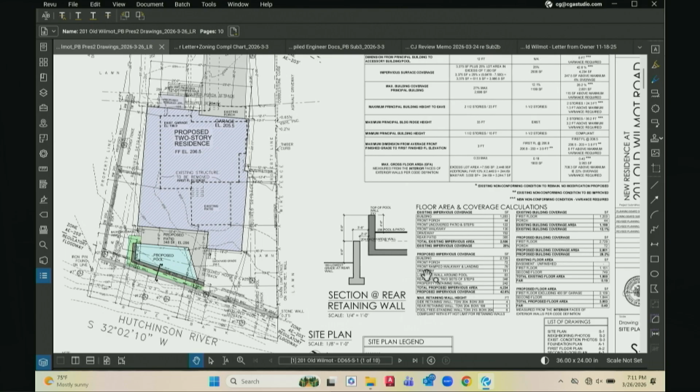This is a proposed new residence. Last time we met, we reviewed the plans with you, and then soon afterwards we met with KSCJ and our engineer, Ralph Mastromonaco. We went over the plans. This is a project that has a challenging site with a FEMA 100-year flood zone nearby, and our engineer has supplied a set of drawings and a report.

At the meeting there were some recommendations and some comments, so we actually adjusted the plans. They're slightly different than before, but a very similar house. We just moved the house towards the front. The house is going to meet all the setbacks.

This is our zoning chart: front, side, rear. We are going to be asking for a few minor variances, and the most significant is the floor area. This is a special home for an intergenerational family, and we are going to be asking for a variance to have a floor area of 3,953 square feet, which is 708 feet over the maximum. But we will not have a basement because of the flood zone nearby, and we feel very strongly we need that kind of floor area to meet the needs of the layout of the house.

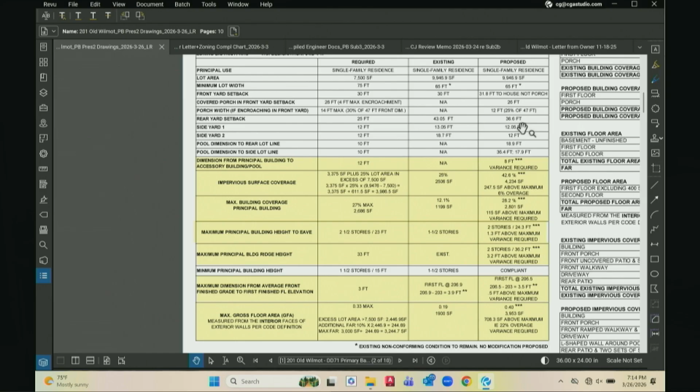Yes, I don't know who did that, but thank you. Okay, cool. The items above that are not highlighted just indicate all the items that are in compliance with the zoning code - setback, all the setbacks that are required. But we are asking for a variance.

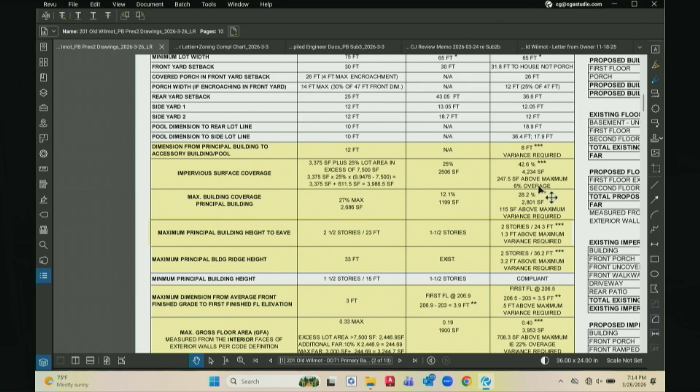One is from the house to the pool - instead of 12 feet, 8 feet - and that's because of the available space we have in the backyard. For impervious surfaces, we're asking for 6% overage, which is under 10%, to fit the house on this property.

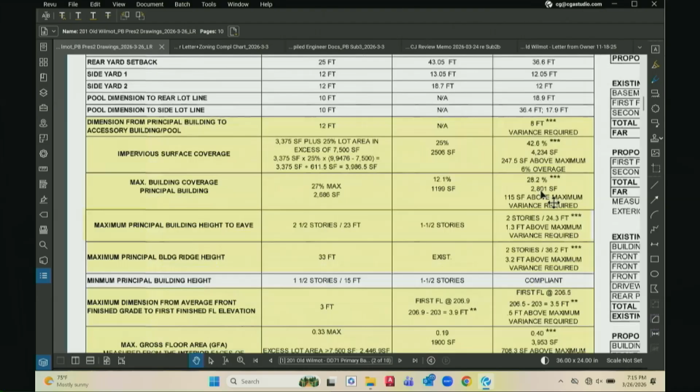We're asking for a building coverage variance that is 1.2% over the maximum, and we are asking for some minor height variances: 1.3 above maximum for the eave, grade to eave, and then 3.2 for the height to the very top of the roof. We'll show you in a minute.

The reason for that is because we want to hit this target for passive house energy, and we need solar panels on the south-facing plane of the roof. And then down below we have...

The front of the house would never meet code, doesn't meet code now because we have to have an elevation of 206.5 due to the floodplain conditions and requirements. That just doesn't meet the maximum height above grade at the front of the house, so we need a variance for that.

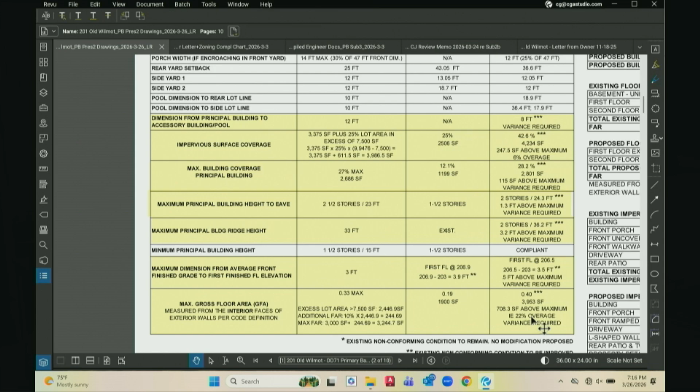On the floor area, we want a house that is 3,953 square feet, and only 3,200 is allowed. But of course, we have no basement, so that also puts us back and makes it so we have to get all the area on 2 floors.

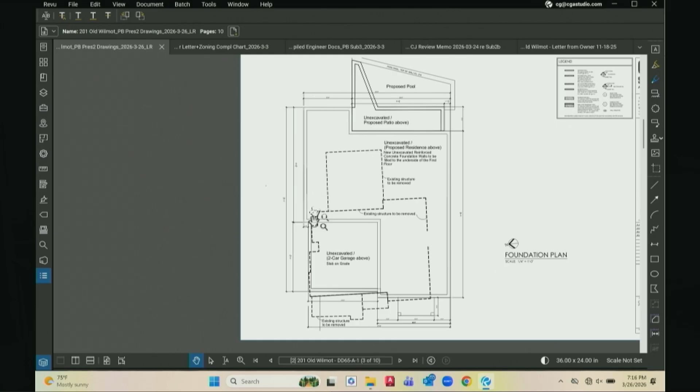Our foundation plan is slightly changed from before, simply because we pushed the house towards the front property line to get more room for the backyard. The entire house will be filled. There will be no basement, no crawl space.

Our first floor plan just shows the layout. We have kitchen, dining, living, family room, and the handicap suite in the back is really important. It allows one of these family members to live at home, with handicap access into the front entrance and through the house to this suite in the back. We're also looking for a small pool and patio.

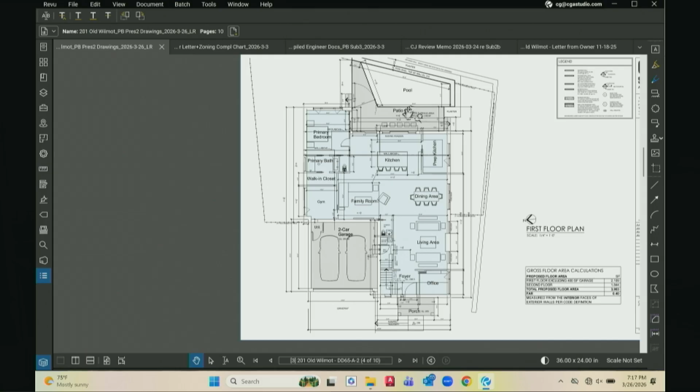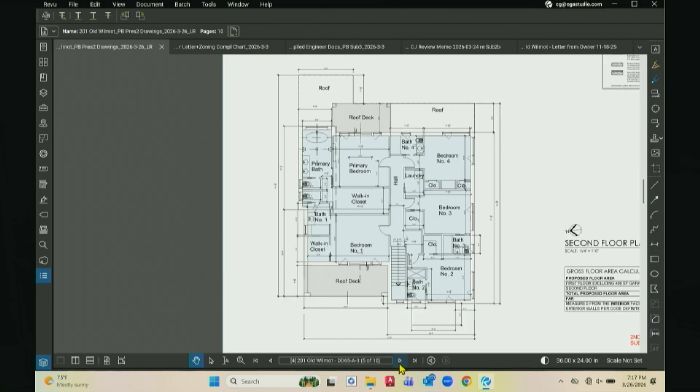On the second floor, we have bedrooms. There is a family with 2 children that will be living in the back, grandmother in the front, and the son in the other bedroom on the other side of the house. This is a family that takes care of each other. Their reason for living together is because it's very important to their way of living and all the care needed for the children and the older people that reside there.

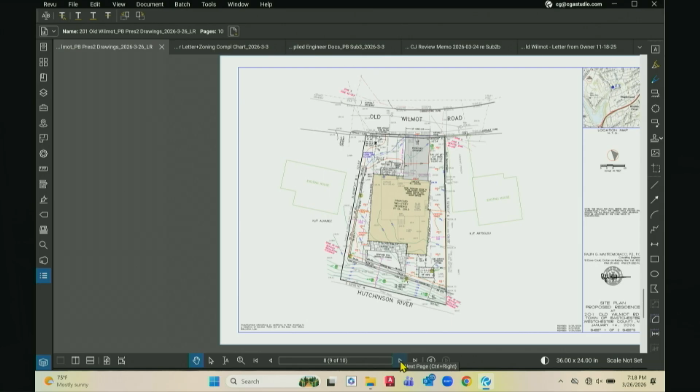I'm going over this again, even though we discussed it last time, just to make you aware of the variances we are looking for. Our engineer is working on providing the information that was in the memo from KCSJ, and I had a long conversation with him today, and he's really comfortable providing all that information. We would also like to go to the zoning board soon, to see if these variances will be granted before we put more time and expense into the details of the drawings.

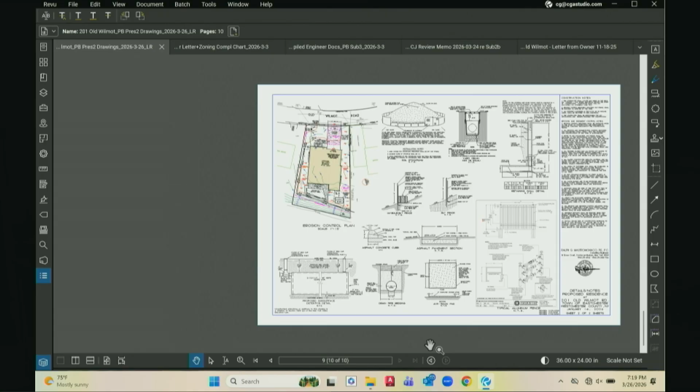Great, thank you. Where is the floodplain? I guess you've moved the first floor up such that you're above the floodplain? The floodplain's in the backyard, right? It's just in the back?

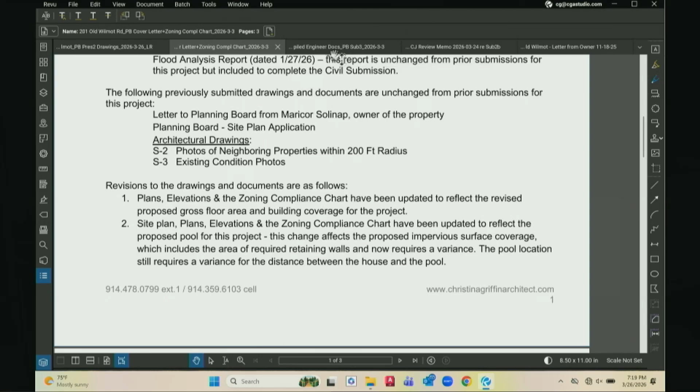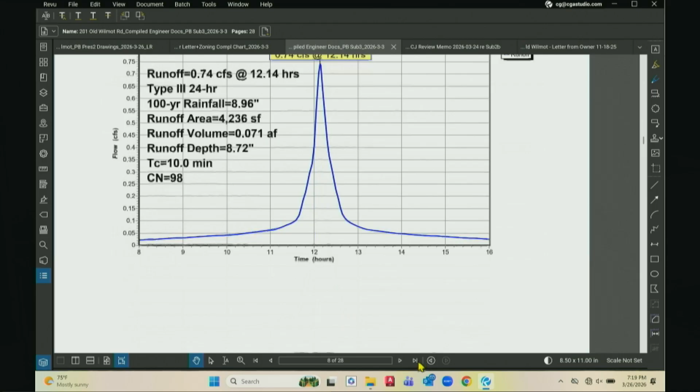I saw, the engineer has a very nice diagram in his report, and I will bring it up. I think it's on the third page of the engineer's report.

There's a report from a Ralph Mastromonaco, your engineer, is that right? Is there a report dated March 2nd, 2026 from Ralph G. Mastromonaco Consulting Engineers? Do you have that handy? Yes, right here, this is a few pages out from his report. Okay, can you go to the third page of that report, because that has a site plan on it as well.

See at the bottom of that, there's something called a regulatory floodway, and there's a pink solid line. It appears that beneath that pink solid line, you're dealing with what we would colloquially call the flood zone. Is that correct? Is this an accurate drawing, or did you say it was recalibrated at some point, or there had been mistakes on some form?

The FEMA maps that the engineer is working with were not updated, and the county was going to update them, but because of funding, they didn't. So what they're showing is not accurate, and he went through an analysis to show it's actually in a different location. But we discussed that with KCSJ, and they said that at some point, maybe before we get a C of O, we should have an official update of the FEMA map, but we're not able to get that at this time.

No one on this board is an expert in water flow and the consequences of a flood zone or flood area, a regulatory floodway, I don't know what you call it, but it does sound like an area that is probably more prone to having surges of water. We just need someone to walk us through what the significance of this is.

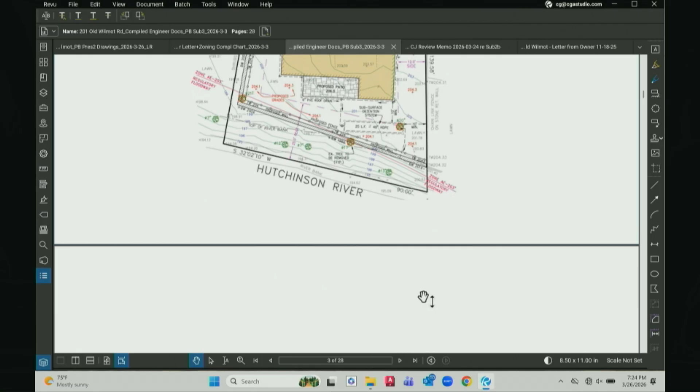Could you just show us the street elevation? I know the massing is just a little bit bigger. Do you mean the architectural drawings as seen from the street? Yep, that's it, right there.

Did you walk us through materials last time? I wasn't here at the last meeting. Well, I can — we even had photographs of the neighborhood at the last meeting to show. If you'd like to see that again... No, I don't want to. Okay, I'll tell you the materials later, I just want to quickly show you this design.

The current house we're removing has a basement that's not used and has a garage in the basement. We want to take everything out of the basement — no basement on this kind of site. So we've brought the garage to just below first floor level, so we have the 5% slope required from the street to the garage, and then a slightly sloping grade to allow handicap accessibility into the home.

This is a house we're planning to have a gable roof. We want the scale to fit the street, and it is more in sync with the larger homes on the street. It will have a variety of materials.

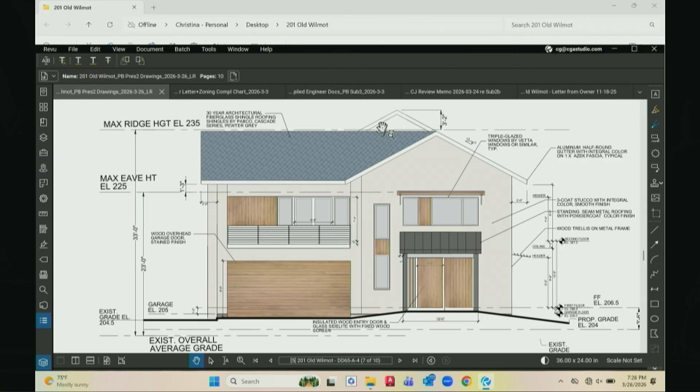The height above the maximum ridge — if you see on the left it says maximum ridge height — the majority of the house is actually under that maximum, but we have a peak here that is set back, simply so we can get another row of solar panels. We set it back to help mitigate the massing and size of the house, so it's only jogged a certain amount back from the front facade.

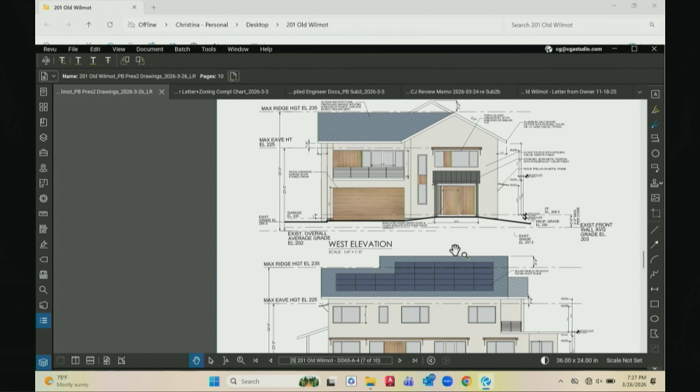And then the side elevation is all similar, all an off-white stucco, with trellises over the windows below, and a deep overhang over the windows on the second floor. There is access to a small patio on the back, and on the second floor there's a small roof deck.

Do you want me to continue? No, I think that's sufficient, thank you. It's very well done.

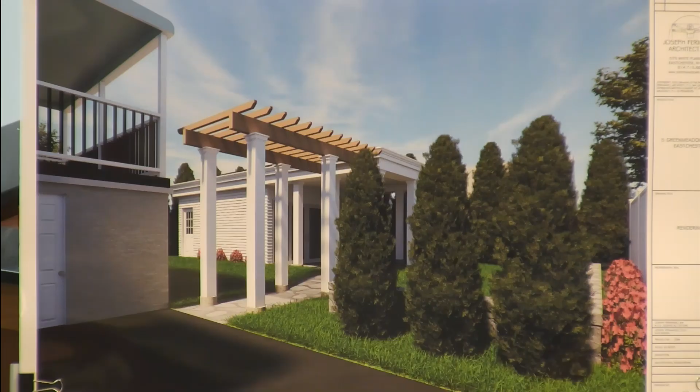The application for the shed has been lowered. The original height was designed at 13 and a half feet, less than the 15 feet which is the accessory structure rule here in Eastchester. In working with the building department and taking the neighborhood comments into consideration, we decided, even though it's built, to lower the roof down to 12 feet. That would mean the roof would have to be removed, reframed, reshingled, and just redone. My client has agreed, based on some comments that he had heard, to do that.

This board had recommended that we go to the ARB, which we did, and we presented this rendering along with some facts about the structure and the finishes, and they had a few comments. They asked for the specific tree type, which we've listed now to show that they would be arborvitaes, anywhere between 12 and 14 feet in height once fully grown.

And we also have a small wall, but it's to sit on, and they wanted the elevation. So we had to show the top and bottom of the wall, which was either 0 or 18 inches.

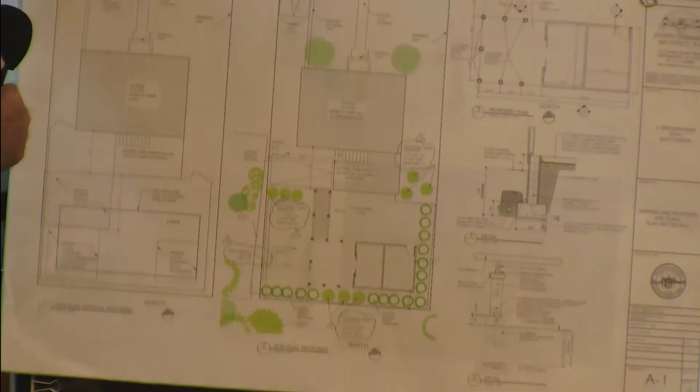The garden wall essentially just goes here behind those trees, and then down along the one side of the property where there's a 6-foot PVC fence. What's the height of the wall? 18 inches, it's a small wall. So you could sit on it, that's all, essentially.

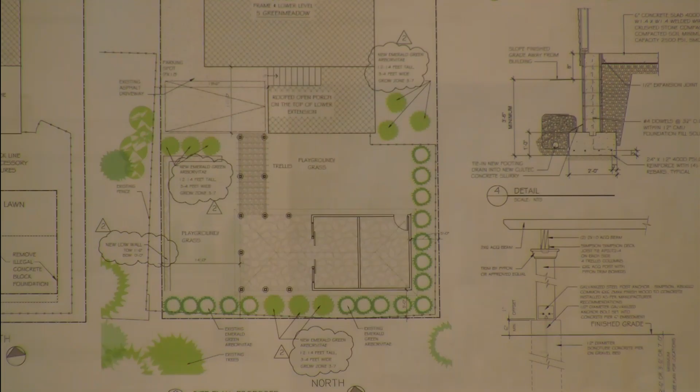Do you have an elevation view that we can see just the massing of the new structure? I know you said it's 12 feet in relation to the existing. Like a plan view shown right here that shows it down 18 inches? No, an elevation view of the entire plan, not the wall.

Just to see the relation of the new structure relative to the house. So this is the structure, and this is the house. Correct, I'm asking for an elevation view, like a cross-section. Sure, like this?

Because the rendering looks a lot more palatable than what it was last time, the massing of the structure, because we've reduced the height. I just wanted to see it in relation to the house. Yep, you can see it here, and this, that's the house. Thank you. Sure.

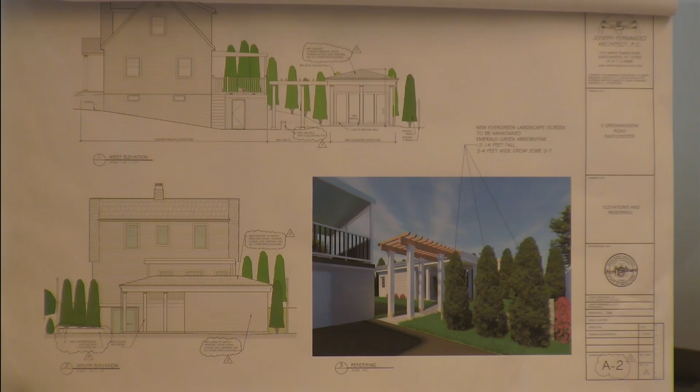Did you change the landscape plan on this now to add new plantings? Yeah, we did add, yes. A significant concern that I have, based on being on and around the property, certainly from Leslie Road you can see that a number of the arborvitaes that are there, I would say rough guesstimate 60% of them look like they're in very poor shape. They're brown, and they don't look like they're going to make it.

So is this going to be all new plantings, or are we talking about using what's existing? What we show on the plan is what the final will be. And if there is something that has not made it, obviously the nursery will have to replace those.

Do you know what the planted height of the trees you're proposing is? I thought what you had reflected on the plan was the planted height, but I think what you just said was the maturity height. So currently I believe they're 10 feet. And that'll be the planted height for them? For the new plantings and for anything that has to be replaced, that'll be the height at the time of planting? Sure.

I think you said 12 to 14. 12 to 14 once they're matured, yes. Oh, what are they going to be when they go in the ground? What's their height going to be when they're planted? 10 feet, yeah, that's what they are now.

And how do we ensure that those are maintained? Because as a general rule, people can take a planting down on their property anytime they want. Understood, yeah, so I'm sure there's plenty of folks that will be watching this. You can impose as a condition that the landscape screening has to be installed, maintained, and replaced for the duration that the structure exists.

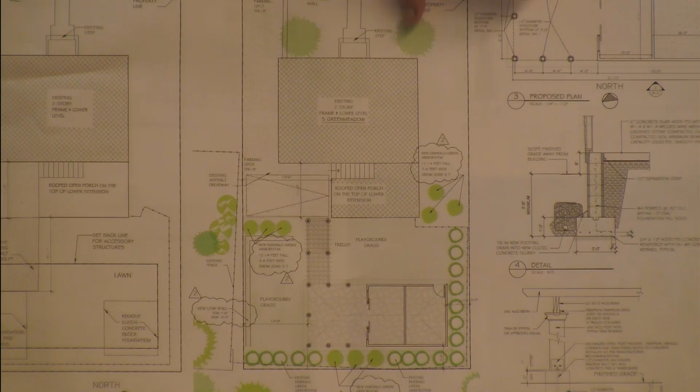And if you were here, there's some space and there's a driveway at 7, and so if you were on the street, you could potentially see something. However, I think the trees are going to help mitigate that.

Is there an option for a different type of tree, one that grows to be much larger? Because just going by Leslie, I'm trying to get my bearings based on the site plan, but the right side of the plan is where you do see it when you drive by Leslie.

I don't know if that's gonna really help with those types of plants, but if you do a larger tree that blossoms to be a much bigger tree, it'll hide everything. It doesn't change the impact on the neighbors, but I'm just talking from the street view. Right now you can see it, and I don't know if that's going to do it justice.

I think that'll change once it's in there and filled in. I think a larger tree, an oak or a maple, has a trunk and then this plumage, right? There's a lot of space there. This is really going to kind of create a screen, and I think this is going to help with the overall disappearance.

I can speak from my own experience. I had a neighbor who paid to have a tree removed, and it was a very large, old, mature tree. It upset me greatly because all of a sudden there was no screening at all that this tree had provided. Well, I paid for the neighbor to put in arborvitaes, and those grew very quickly, and they provide an excellent screen right now.

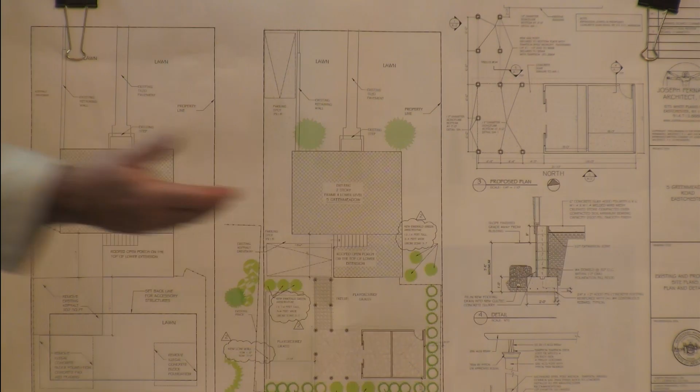Remember this entire site had nothing, just a small bush between 5 and 7. There was no coverage at all to look down into this property. So I think the amount of screening he's putting in is really going to deflect people.

What about the eastern-facing neighbor? Do they only have a fence between them? Number 6, which we did many years ago - that recently changed hands, young couple in there, and they had no issue. The property also slopes down that way, it does slope naturally, away a little bit.

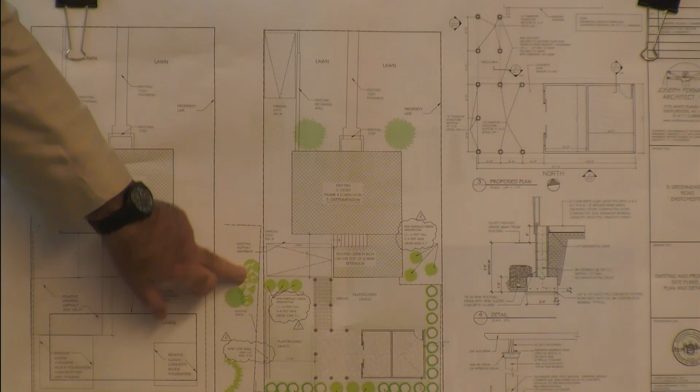So there's nothing blocking it from their vantage point? There's nothing blocking - there's a fence there, but no trees. A 6-foot fence. And I think they have a little bit of landscaping that currently exists on their property as well. What's the height of the structure, the final height right now?

The final height, if approved, would be 12 feet - you have a 12-foot arborvitae. I feel like 12 feet for those trees isn't going to be enough, personally. 12 feet would be the ridge, so the entire thing would be covered at eye view, but you're at a lower elevation. If you're at a lower elevation, unless you're gigantic and 20 feet tall, you're not going to be able to see over that.

You're looking at an angle upward, right? Right. I still think there's other species out there that could be taller than 12 feet. As a screening, I think this is the best option.

So I think we're going to write this condition of approval - if we find that these trees just don't survive and need to be replaced, can we ask them to put something in that gives more screening? Sure, we can craft the condition to reference the species proposed on the plan, or a species with similar features, particularly height and width. Similar or greater features. Right, right.

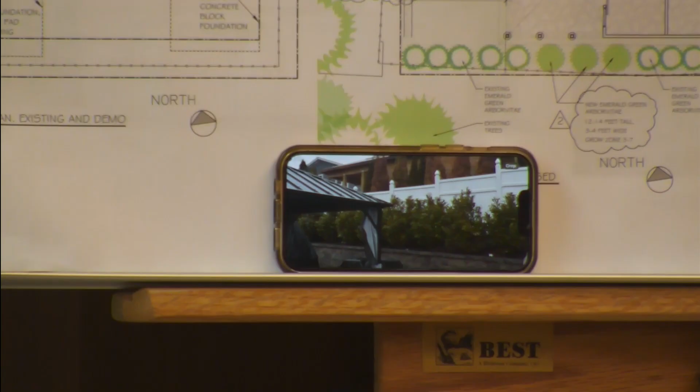Okay, you can go now. This is looking from your house? Yeah, so that's my backyard, it's like here, and then you come outside and you see that, and the trees are already starting to die. How is anybody even gonna maintain them if he's gonna run trees throughout that whole side there?

Yeah, the trees are already dying, not surviving. They're going to put new trees - that's going to be part of this approval, obviously those trees have to leave. And if they go into disrepair, they got to be fixed again. Not only that, we're going to ask them to get a species that will survive there.

I don't know how to answer the question about how you maintain them. Yeah, how is this going to be policed? That's the question, because I'm concerned - I've seen that myself. I commented before that it looks like 60% of the trees there, rough estimate, are brown and dead. They're never gonna survive.

That was the first go-round, what makes us think the second go-round is going to be any easier? Because there may be a problem with planting in such a tight area, and maybe there's bad soil there. I don't know. But what happens if, and this is a very real possibility, the brand-new, very best trees don't thrive?

And we heard that, so the nursery will come back and replace them. Well, I know the nursery isn't probably going to come back and replace them indefinitely, five years from now and whatever. So this is a continuing issue, because to me, this is a deal breaker if you cannot shield this structure from Miselia, from the Farmasanos, from all of the neighbors who have complained about what is admittedly a very large structure, a disproportionately large structure, even if it is technically code compliant.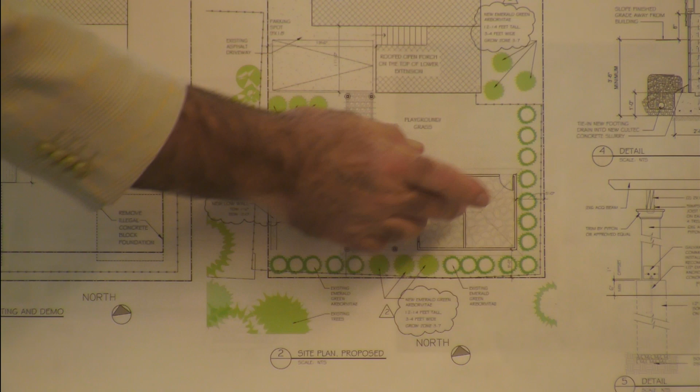And this is really where the storage is - that single man door is in the back. Understood, thank you. So just to Mike's point about doing the neighborly thing, since they're reframing the roof and everything's coming down, it'll be just as easy to move two walls a foot to be neighborly. It's not a big deal. The foundation is all built - are you suggesting to tear it down to the ground and take out the foundation?

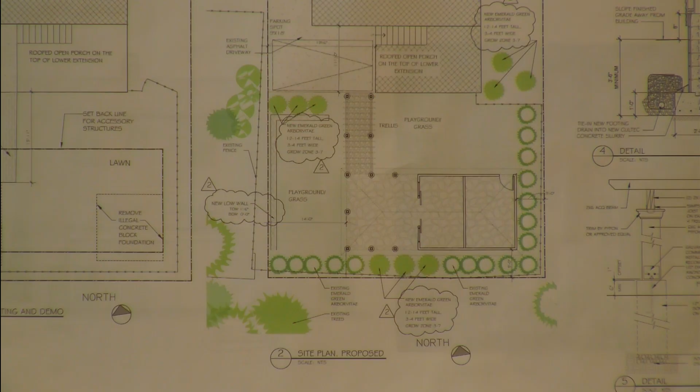No, not at all. You just shore the thing up, move the foundation, put up another wall - not that complicated. That's a big ask at this point, especially since - no, I'm just saying his request wasn't overspoken. It was, you want to do the right thing, make everyone happy, take a foot off both sides, and everyone walks away. He's already talked about lowering the roof. Sure, thank him for us.

So back to the landscape architect - can you get him to come up with a species that we think will live there and thrive? And can someone draw an elevation? So what we'd also like to see is someone show us what this is going to look like from the neighbor's yard. Please draw something really pretty that the woman who came up here says she's going to look at every day. Right now I have it in my head, but I don't really know what it's going to look like. So when that architect is hired, please ask him to draw enough elevations from enough aspects where we all feel good that this is being covered.

The landscaping that's currently there was installed some time ago, last year I guess. Since this process has started, he's been a little taken back by the whole effort, unfortunately. If you went in the backyard, you'd see there's stuff on his lawn, and he's just kind of upset with the whole thing. I think there was no irrigation installed - there should be watering irrigation lines that will constantly keep these things watered. And if they're watered, they're going to grow.

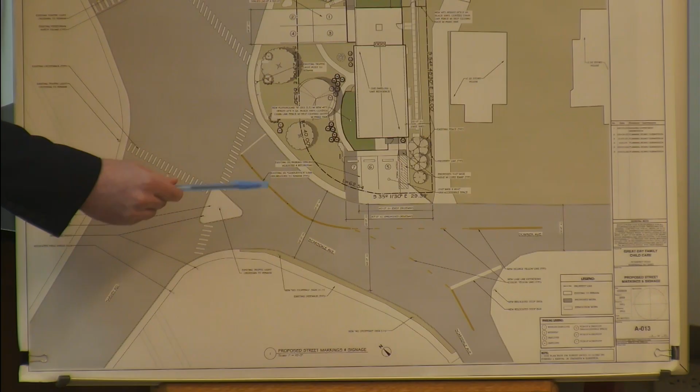I want to move to where most of the actual modifications have taken place, which is the center of the plan here. Right here in the driveway off of Harney, this will be updated to show no modifications at all. We are proposing not to touch that driveway and to confirm there are no pickup and drop-off operations proposed at this driveway. All of those operations will happen in these 3 parking spaces along Downer/Scarsdale, and we're showing that the width of the driveway is existing approximately at the beginning of the gray area, and will be extended towards the end of this gray area.

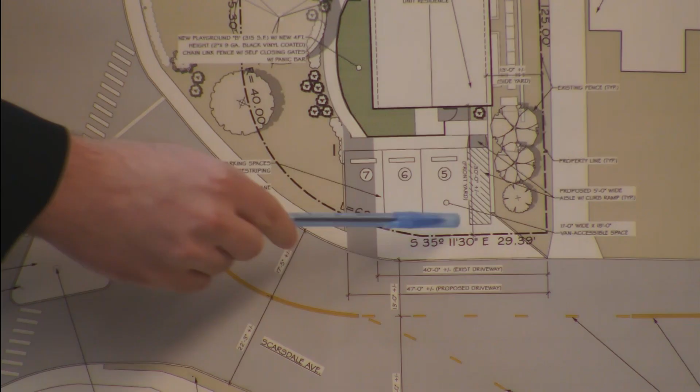We are providing enough space for these 3 parking spaces, one of which, the one all the way on the right-hand side, parking space 5, will be a van-accessible ADA parking space. There was a little bit of confusion in our prior comments and submissions about that ADA parking space, and we just want to provide clarity. The site is required to provide 1 ADA parking space, which has to be van accessible. All that really means is it's a little bit wider than the other parking spaces directly next to it, and it has that access aisle right there.

Now we also have some additional signing and striping here. You can see that the roadway has been changed quite a bit. We were able to do this in conjunction with conversations with Dr. Greeley, who, as we discussed in the prior meeting, noted that Scarsdale has quite a bit of space and width here, approximately enough for 2 cars to be side by side if traveling in the same direction.

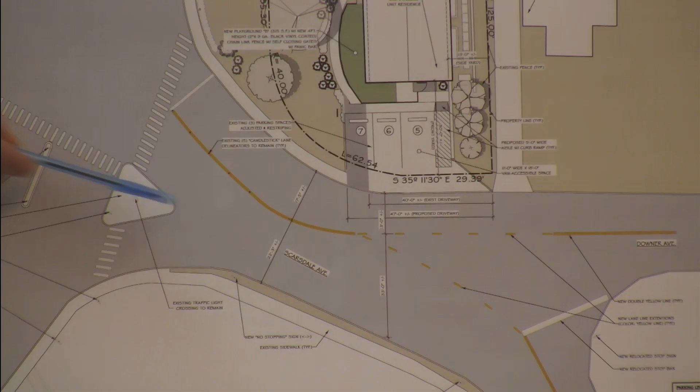In order to formally demarcate that and determine how much space is really there, we've taken the existing striping that shows the center line of the roadway and extended it to approximately where the pickup and drop-off area begins. We've dimensioned out where the narrowest point is, as well as approximately where the narrowest point of the other side of the road is.

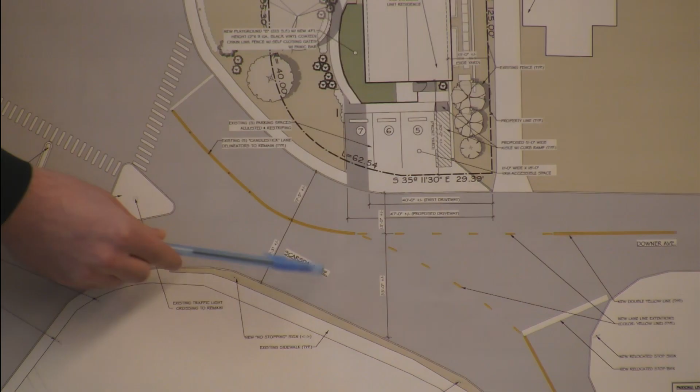You can see here, on the key direction where people might be taking a left into the driveway or going around them, we have a little bit over 22 feet in width, which would allow us to have 2 11-foot lanes—typical lane widths are about 10, 11, or 12 feet. So this allows for 2 very typical 11-foot lane widths. This is plenty of space for someone turning left into here, and if on the odd chance there's someone traveling right behind them at the same time and they need to go further around, they're able to safely take a right and go around them.

Now, in order to also help that movement, because we understand that is a key movement, is the potential for someone to take a left in here, we recognize that currently people may park along this side of Scarsdale. So we are also proposing to add 2 new signs, one approximately here and one here, that are no stopping signs to show that you can't actually park your vehicle there. This is very similar to the other side along our site frontage, which already has signage similar to that to show you can't park there. That's important as well for this movement here.

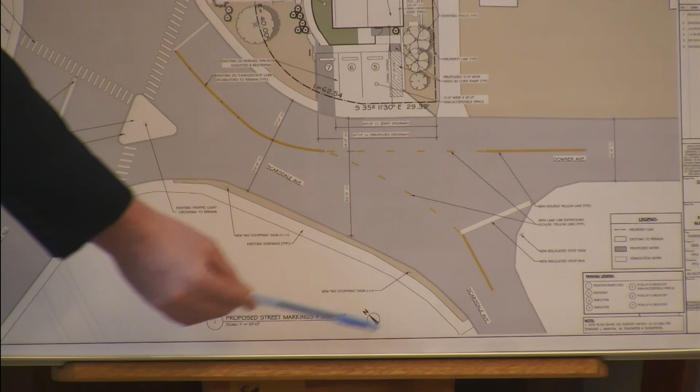If you've driven around here and tried to go from Scarsdale and turn onto Downer, you can notice that the current stop bar, located to the south around here, if there is a car parked here, it is very difficult to see anyone coming from Harney in this movement. You have to instead come up to the intersection and try to look both ways. There is also a bush on the corner here that hinders sight visibility. So those reasons are why we are proposing to move the stop bar from its current location to closer to the intersection, where people have to stop anyway to see both directions of traffic, to make that a safer movement and increase sight visibility.

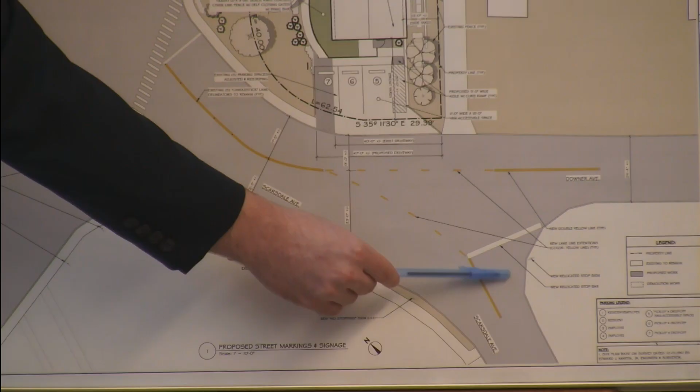Now we also have some striping right here to show the movement you would take if you were on Scarsdale to come up and take a left. This is again to allow for better traffic safety, mobility, and efficiency. With all of those updates, we do believe this would operate safely and efficiently for people attempting to pick up or drop off their children in that pickup drop-off area off of Downer.

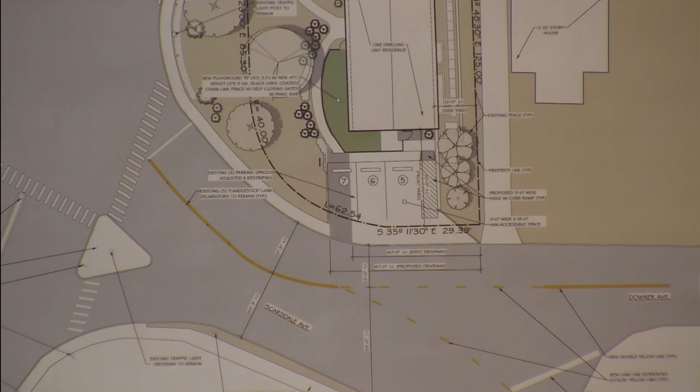Can I just ask, where you have the crosswalk here, underneath the triangle on your illustration, that's one car width, right? Can you point that out again? Below the triangle, directly beneath it, the crosswalk there? Right here? Yeah, that's the right turn off of Brook Street, or Harney? I'm not sure of the exact width of it, but it would not allow for two cars.

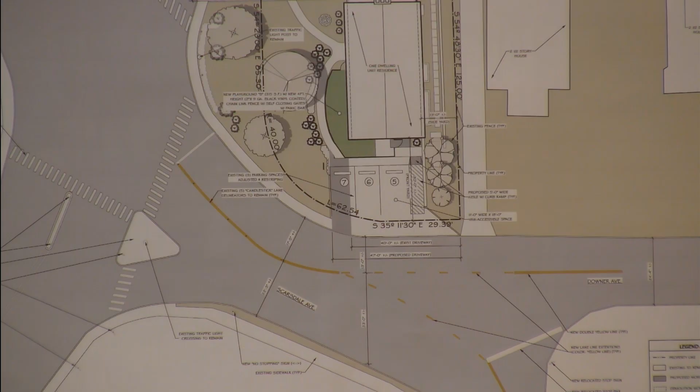It's one car, yeah. I don't live in this area, but I've been here many, many times. It's a very difficult intersection because you're coming off of the Bronx River Parkway or across the Bronx River Parkway. There are two lanes, and right at that stop there's a traffic light. There's a left turn only lane, and then there's either a right turn or straight in the other lane. So the lane from which you would be making the right turn onto Downer is already sort of a bottleneck, where you're getting the traffic going forward and the traffic going right. It strikes me that envisioning this as two lanes of traffic going in that direction is wishful thinking. You can put all the signage up you want. That's blind signage coming around the corner. I will need a lot more convincing to believe that's two lanes, based on my own experience with this site.

If I may respond to that, Elaine Dew, licensed professional engineer in the state of New York, traffic engineer with AKRF. Just to clarify, we are not changing anything about the lane width over here, we're not modifying anything. Yes, that provides enough width for only one car, and we're not proposing to widen that. Over here, we're just changing the striping slightly so that now you're allowing a vehicle to pass by if there is, for instance, someone waiting to turn left into the driveway here on Scarsdale Avenue. So we're not proposing to actually stripe a second lane, but we're showing the measurements to show that it's wide enough so that you can pass if that is needed.

Okay, I remain skeptical, that's all. What is that width? Can you just zoom? Which width, this one over here? I think it's 22, you said it was 22 feet. It's just over 22 feet. And then there's another 11 feet on the other side? Yes, this is 11 on the north side, so 22 feet on the southern side. Correct. Which is sufficient, again, for a vehicle to pass by if someone's turning left. Sure, and I guess currently the usage is just one lane, is that what you're saying? Yeah, current usage is just one lane. However, it's striped as a very, very wide lane. So just to clarify, the intention is for it to still function as one lane, however it could accommodate if you had a driver. That's what you're saying?

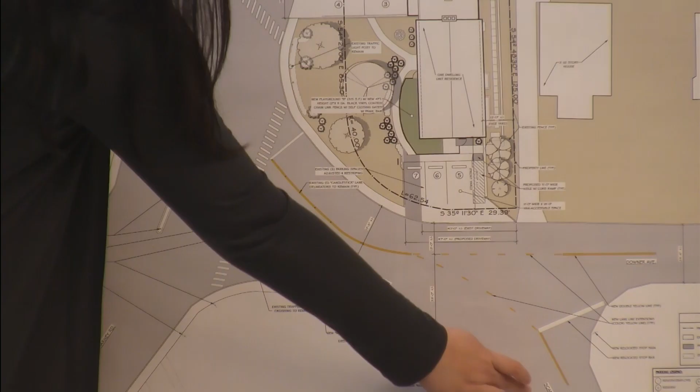I also wanted to make a note. Currently, as Wyatt has said, parking is allowed here. However, if you've ever turned right here onto Scarsdale Avenue and encountered a parked car, that is not safe - it's not a safe maneuver. You're at that point going to immediately maneuver around that car. And if you're in fact trying to turn right to continue down Scarsdale Ave, it affects your safety in terms of your maneuverability around that vehicle. So we believe that removing parking over here is overall a safety improvement.

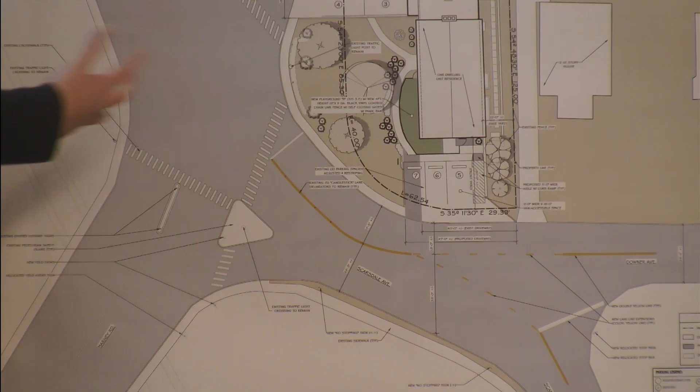Beyond that, these are improvements that we've discussed with Dr. Greeley - improvements that he had recommended, and we've collaborated on this. We understand that a lot of the residents' concerns stem from safety and operations of this intersection, or both intersections combined. These improvements not only improve safety for access to our site, but also general safety for residents traveling in the area, improving sight distance, turning maneuverability and operations. Overall, it's a safety improvement for the community.

Are those parking spots metered, or just street parking? Are they residential parking, time limits, anything like that? There's just no signage there, so it's almost open-ended. There's nothing there that tells you what you can or can't do.

And how many cars could presumably fit there? I'm not sure of the number off the top of my head, approximately 3 or 4. So residential probably, if anything? What we had noticed when Wyatt was in the field, he had noticed vehicles parked on that side of the road, and we believe these may be residents, or not residents, but people parking here so they can go to the train station north or potentially access the Bronx River. We're not certain, but we don't believe they're residents parking here.

Right, it sounds like they have to go regardless, right? They're just making it even more difficult. Just an opinion.

Sorry, I have two questions. I know our consultant's probably going to share feedback, but two questions just for me to clarify, so I have a better understanding. When anybody leaves the facility, is there a certain type of regulation that they have to only go one way? They can't go the other way, right? Is that going to be like a regulation?

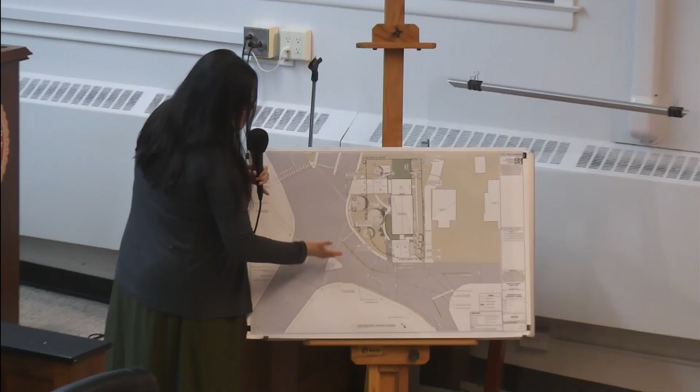So we are not proposing any turn restrictions or driveway access restrictions at the moment. A vehicle exiting the driveway would be allowed to continue down Downer, or continue to Scarsdale onto Harney, whichever direction they want. However, if the planning board is interested in restricting that, I'm open to hearing those suggestions.

Another question I have is whether there's street parking on that side right now, on the adjacent neighbor to this. No, there is no street parking there, so that's a clear space for driving. There is street parking further down, but along the site frontage there's a sign that says you can't park here. How far does that go, toward the neighboring property or not?

I would have to check, but I believe there is parking right after the driveway point onward. So, further to Joe's comment about how they exit, they enter head-in, right? That's correct, so they have to back out. So you would think there's only one way to back out, and that's going that way. They could actually back out and go onto Downer?

They would be able to do that movement, and there's also going to be an employee here. Would they or would they not be able to? They would be able to. Even though it's kind of silly, they could do it, right?

I wouldn't comment on their traffic movements or patterns after visiting the site. I agree. Just based on general traffic patterns in the neighborhood, because we're primarily expecting vehicles to come to and from Harney Road, we would expect that they would leave the site in the same manner.

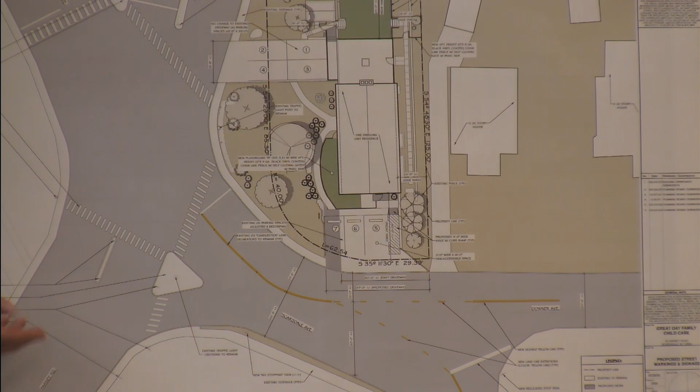Just one more comment. I think you explained that the town of Eastchester Highway controls most of that intersection, but the county controls what? Yeah, it's a bit of a strange scenario, but Harney Road itself is controlled by the county, and then the town would own essentially this area onward, which is why there's that confusion. Although this portion might technically be considered Harney Road, it's actually a town jurisdiction area.

So all of the other traffic control devices you've spoken of are under the town's jurisdiction. For that portion, yes, which is why the town would have to be the one with jurisdiction to relocate or change any of the signing along that area and onward. I'm going to ask Dr. Greeley the same thing, but has the town highway been part of the discussion about this? I believe they were at the meeting on February 9th that we met with them before. Great, and they had no comments on that. Yeah, the highway superintendent didn't offer an opinion one way or the other.

He did express some concern in the planning memo. He conveyed his comments to me verbally and I added them to the memorandum for this meeting. His concern is that conditions at this intersection are variable, especially with bad weather. It's a hard area to plow, difficult in ice, snow, and rain. There's speeding that occurs here, and traffic volumes are significant at times. While it may function fine in nice weather, he's more concerned about how it will function in poor weather. I wish he came tonight - it would be nice for him to hear your presentation and see what he has to say.

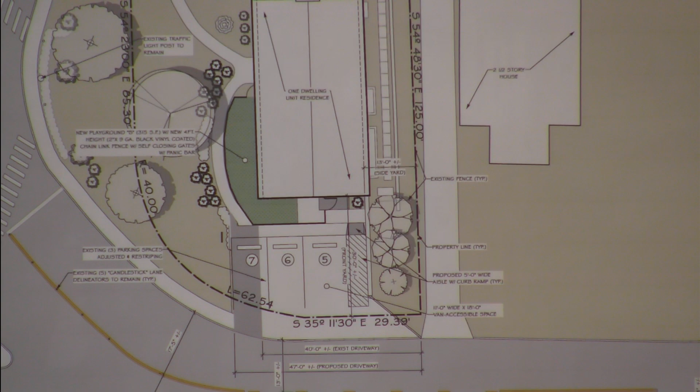And so I want to draw your attention to some safety concerns and practical issues. The code requires a minimum of 750 square feet of fenced outdoor play area. I believe that infers one area of 750 square feet, and also 50 per child, which for 15 kids gives you the 750 square feet. If the applicant splits that into 2 areas, you have one that's 565 and one that's 315 - if you entertain that idea, that means you're limited to about 15 children.

In the front yard, it will only be 5, and in the side yard it would be 10, because of that 50 feet. That means you have 2 separate areas. So because of the supervision requirements, one area has to have 2 staffers, the one with 10, and the other area has to have 1 staff.

So that's 3 staffers. If there's a kid that doesn't want to go out and play, if there's a drop-off or pickup, which is supposed to be supervised, which they're going to assist with, they need a fourth employee, because 3 people would be in the play area. So that doesn't really work. It should be one area.

It's inferred by the code, the special use. It's a real constraint. Now compounding that, it also says it can't abut a public street. It abuts Harney Road. And to directly quote the chief: 'I would never allow a large amount of children to play in that front yard.' The chain link fence, the propensity for accidents, the risk of someone driving right through that.

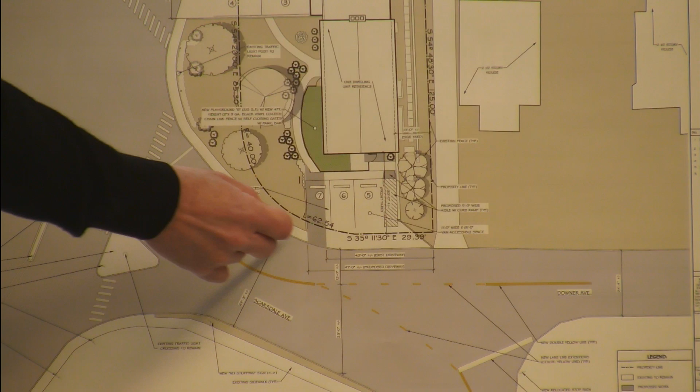This point here, only 1 car fits here as you're trying to get to the light. If you had more than 1 vehicle dropping off the children here, more than likely you would have spillover to this area here. And for me, individuals would be beeping their horn to get by, to try to make the light, to try to get onto the Bronx River Parkway and get to work, and it would be a quality of life issue. If this was approved, I could see neighbors calling up the town, complaining, and it would be an issue. It would be an issue for the police department.

So in closing, for me it's a quality of life issue also. I feel for the neighbors next to 32 Harney, because again, if it was approved, what's going to happen to their home values? Who's going to want to move into a home where there's kids there? We all love kids, there's no doubt about that, you know? But, you know, you're gonna have children out in the yard.

This business is gonna be open for 12 hours a day, basically - 11 and a half hours a day, Monday to Friday, if I'm not mistaken, is it 12 months a year, you know? So I would just ask on behalf of a lot of the people that I'm on the board with, Rich Handel here and others that are here tonight, for the neighborhood, and on behalf of those who can't be here tonight, I please urge you to reject this application. Thank you very much.

So if we just come to this picture of the road. Hopefully there it is. Okay, so right now, this is a space for one car, this is a space for one car, this is a space for one car. And we have a little bit of this double solid line with those little spiky things there.

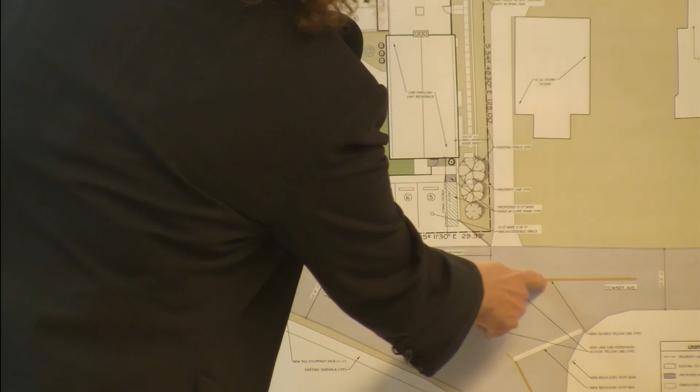So what we're doing is adding some yield signs. That's not doing much. We're extending this line, and somehow we're putting this here. This can't work because this is parking. This is parking, and it really has to stay parking. It would be quite unfair to take away the parking in front of this house when every other house on the street has it. So this line cannot - suggesting this, especially if I'm a traffic expert, and a traffic expert is suggesting this, I really think that I would question everything that traffic expert has said. But leave that aside, this line cannot be here.

Everybody driving this way is going to be here because there's parked cars, and we frequently have to tuck into a parking space to let people come by. So this is a fallacy. Ignore it.

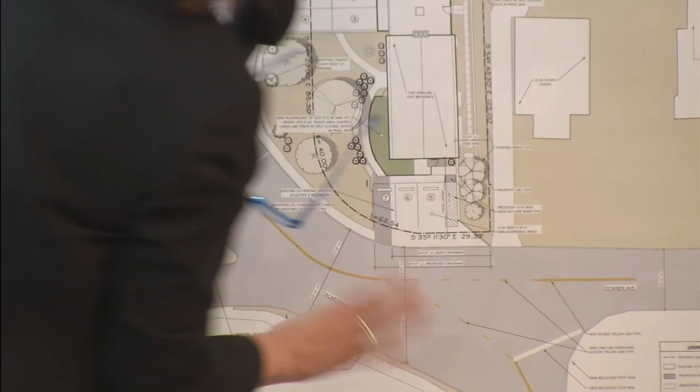Here now, these kind of dotted lines, it's very confusing. I don't suggest putting in anything confusing like that. Now here, they've basically said you come in and a car can wait here for these spots and you can go around. But do you realize what they're saying? First, they're saying it's safe to pass on the right. Anybody learning to drive knows it's not safe to pass on the right.

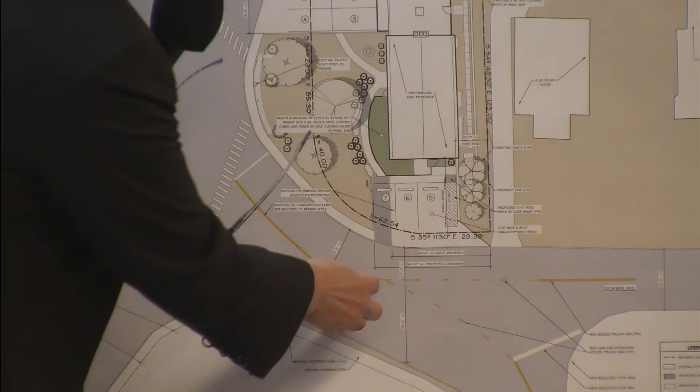But anyway, let's say for a minute we're gonna try to do that. You have a car here waiting, and let's assume it's one, but it won't be one - there'll be multiples. But let's say there's one car. You're saying that you can swerve into and pretend that you were going to Scarsdale Avenue and then swing around back to Downer. Is that safe? That's not safe. It makes no sense.

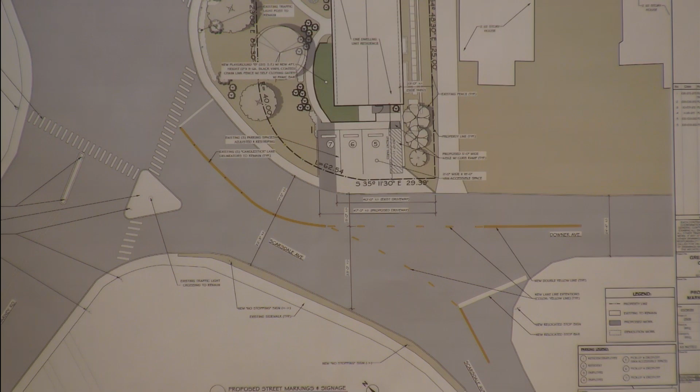Now, I would want to say another thing. One of my - I think it was Andrew who said how many times he's waited here, a couple of times, because when you try to turn onto Downer, try to turn onto Harney to go to the Bronx River, you never want to go to this lane. You always want to go to this lane because you need to go that way to take the Bronx River north. So because this is usually backed up, this may have a space. People wait here for an extended period of time until they can get to this right lane.

So it's going to back up. It backs up now. And so also to say, when Dr. Greeley was saying with some of these mitigants, it's not going to enhance the situation. When you're adding essentially 15 in and 15 out in the morning, 15 in and 15 out, how can 60 trips not add and exacerbate the problem? This is common sense.

We don't need a traffic expert to say anything about it. 60 more trips, it adds significantly. This is common sense. Are you saying 60? 60, because 15 times people are going in, 15 times people are going out - that's the morning, and that's 30. And then you have 30 in the evening. So it's a lot of increase.

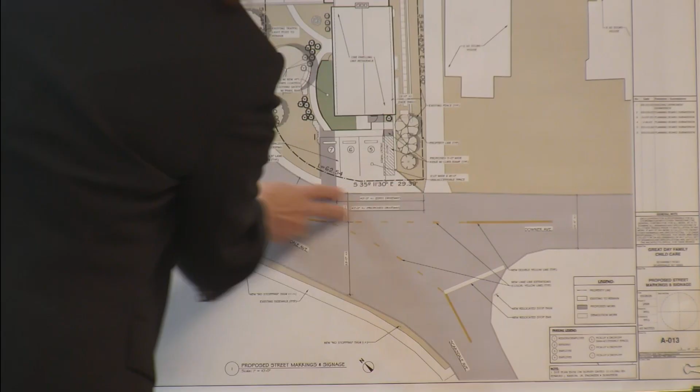And then here, you have all these dots and you're getting very confused. So you're saying you can go around these dotted lines. It makes no sense. There's no parking here. This area, I don't personally experience that a lot of times the cars are parked there. And it's already tight enough because the reason this is a little wider is not because it's another lane - it's because it goes into this street, so it allows the even flow. To say that these are 3 lanes here, this is disingenuous.

So I do want to say that. Then I want to talk about snow quickly. We had a lot of snow this year. And I can tell you, I experienced that problem about the highway owns some of these roads, the town owns some of these roads, because during the snowstorm, a little further down on Harney, they didn't plow it - they put the snow there.

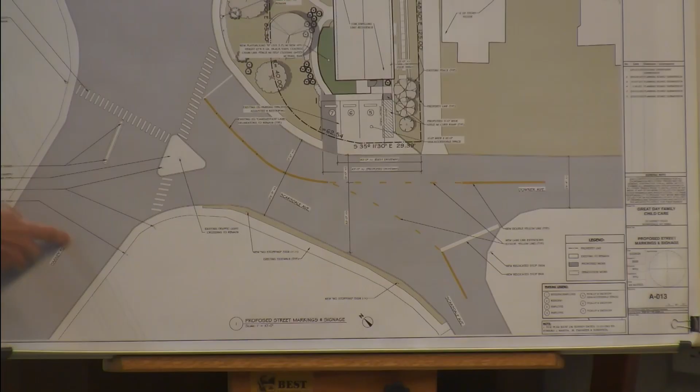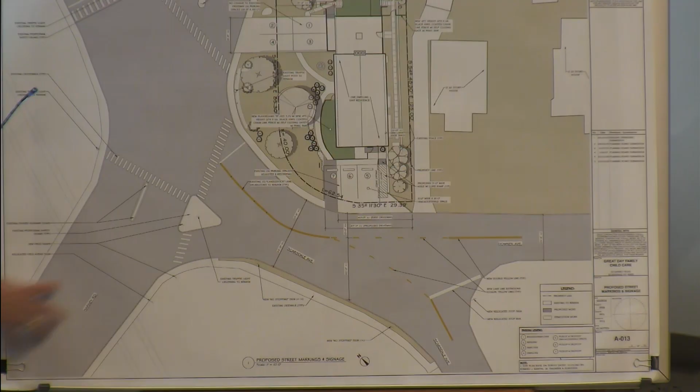So you were in a really bad spot where you had to go here, and then this is a turn only, so then you had to go there, and they can't even get all the snow off this part because it's too small for the plow. So usually there's a lot of snow in here, and that's what we experienced this year. And I called the highway department, I called the town, to get them to clean it up, and it took a couple more days. So really, none of these things help the inherent problem caused by the space. And as I said, this is a key spot. It's the access to the Bronx River, it's the access to the Metro North, and it is the way that over 180 houses go in and out, other than the really steep way by Maple.

So that's that part. Now, we've been talking mostly about that, but let's not forget all the other problems with this whole idea.

Actually, before we leave it, people mentioned the highway superintendent and the police chief. What was said was very grave concerns, because the highway superintendent said he's very concerned about the ability of this to function appropriately without negatively impacting the intersection. This is the highway superintendent. For the planning board to choose otherwise when the highway superintendent is saying this would be quite incomprehensible, really. And he said these factors are likely to impact the access to, the functioning of, and the efficiency of the drop-off pickup area.

And he further explained about sanitation and so on. But the police chief, I won't read the parts that my neighbors have read, but the police chief said that he still believes there's inadequate parking, and with the times involved, it will conflict with school buses, Beeline buses, and sanitation pickup.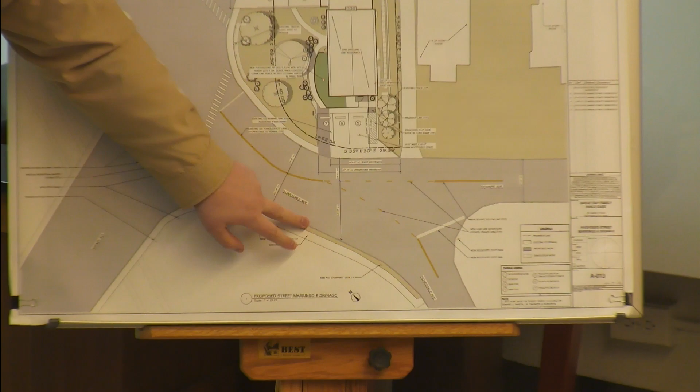One other thing I'll say about the parking, just briefly — the parking right here, 80% of the time when I see someone there, it's a police SUV. So people are watching that regularly. If you're flying down this road with cars parked on the side and pedestrians walking up, you're crazy, because there are risks here and there's a cop here a good portion of the time. I know there are bad actors, but the vast majority of us go down that hill very carefully, whether because of the cop or because we're dodging in and out of the parked cars and know there are pedestrians coming up.

So I thank you for taking the time on this. This is a very well-organized neighborhood, and I encourage you to think through everything. Thanks for being here at 10:25. Thank you.

Hi, I'm Pat Mastalone. I live at Rutgers Place. I've been here since 1973, so I've seen a lot, I've heard a lot.

I think the one thing people aren't aware of is that we've had an accident on that corner, where somebody got hit and was hospitalized while crossing the street with a child. One of our neighbors petitioned to get a crosswalk light put up there. So that's first and foremost.

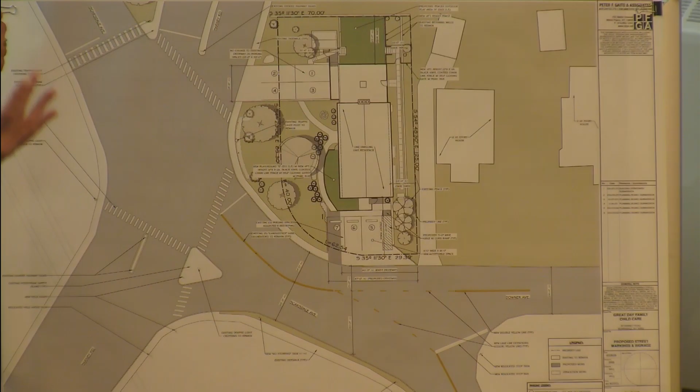The Beeline bus does take people, but a lot of people walk to or from the train. It was actually my suggestion to TPAC to go through the records over the years and see the history of all these lines. A little bit of sidewalk was added here, but you don't just do that—you have to walk on the street, then get onto a little more sidewalk, then there's a light and you have to cross.

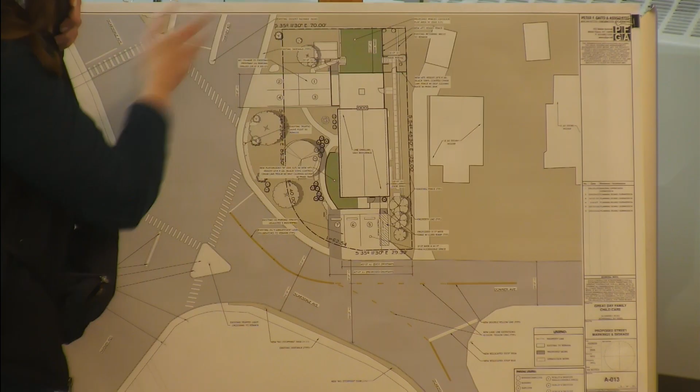I personally was almost struck by a car one time, a woman coming from Scarsdale Avenue making the left onto Brook Street. I was walking, she was texting, and she had to slam on the brakes. That's what happens at that intersection routinely. Please just look at the TPAC records.

Again, this is like a star. You've got 1, 2, 3, then 4 and 5, and the proposal is that while all this is going on, people are swooping around. It just doesn't make sense. This area for the kids is like a disaster waiting to happen.

I live on Downer, further up the street, and my kids never played alone on my front yard. As common sense, you just don't do that.

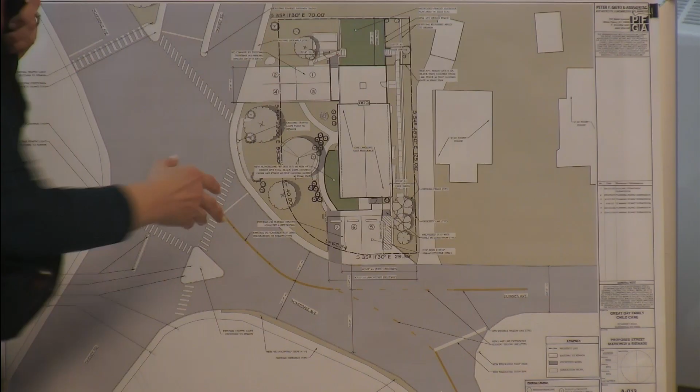And then you've got cars, and you're going to have little kids, maybe 2 to 4 years old, out here. What do little kids want to do? Their mission in life is to run away from you. They would run away from you.

So anyway, I appreciate all the time you guys have put into this, and thank you for letting us overstay probably our welcome. You're welcome, thank you.

Good evening. My name is Luigi Pellicciari. I live next door to the applicant, and I'm very concerned about all this talking about the traffic. It's a very, very dangerous intersection. Believe me. Consider that - I strongly oppose the proposed commercial child care facility next door to my house. Also, I'm very concerned about the safety of the children and the pedestrians. Deny this application. Please, just deny this application. Doesn't belong there. Thank you very much.

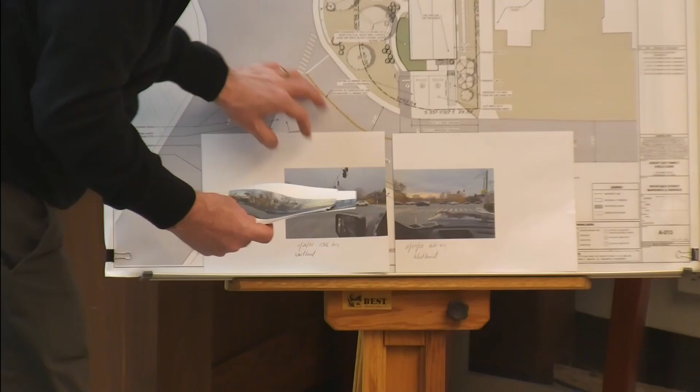Here's the vehicle accident with the EPD patrol car there. That's fine. This is just some of what we have to deal with. Okay, the accident is on the left, I guess? Yes, this one here. Zoom in. Got it. Yeah, that's right at the turn.

Hey, Gary, could you just do the same thing on the other two? Could you just move over? Right, that's cars backing up. Same thing, sort of shows the amount of traffic through the intersection - blocking the traffic, blocking the box. Put it up, just put it up there, over the other one. This is from December 3rd at 4:05 in the afternoon, with an EPD car sitting here, just kind of watching the traffic.

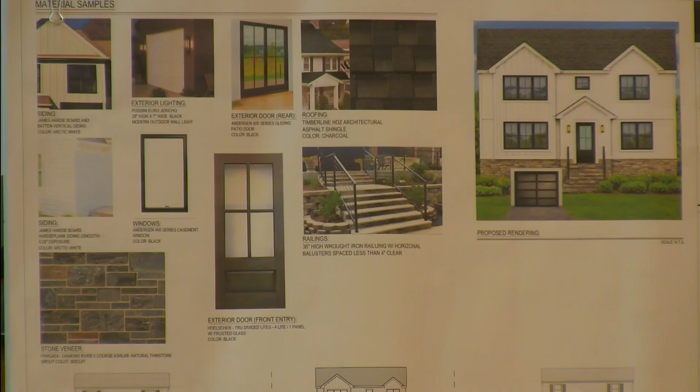Our application tonight is for a second floor addition. We already obtained approval from the Architectural Review Board. The project is just a second floor addition, we're not doing any site disturbance. It is over an existing one-story structure. The house exists as a Cape Cod style house, and we're proposing to expand the second floor to turn it more into a colonial space. My clients are a young family with young children, looking for the space they need, thus the second floor addition. They're modernizing it, bringing up the values of the adjacent houses and neighborhood.

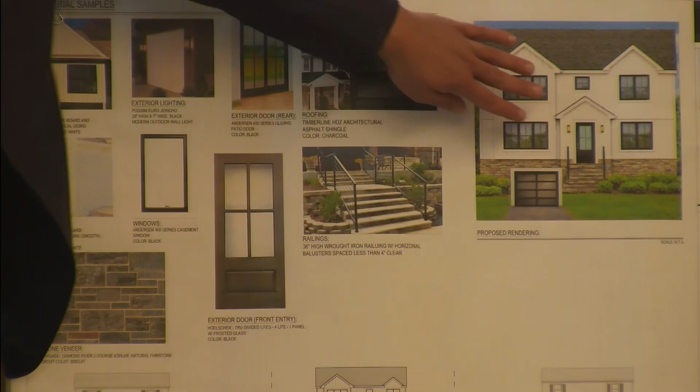Very quickly, and I could present as long or as little as you want, but this will be a crude rendering we had prepared of what the aesthetic of the house will look like. And at the bottom here is a streetscape of our house in the middle with the existing houses on either side, just to give you an idea of the scale of the project.

All of our sample materials here. And like I said, I can end it here, or I can go on to elevations and really walk you through everything if you like. I can show you floor plans.

So yeah, you're doing well, keep that pace and we're good. Okay, gotcha. Just let me, do you need any variances?

No, because you're building on everything in the same zoning footprint, right? Correct, yeah, everything's zoning compliant. And you're not building over the height restriction? No, we're fully compliant there. Just to expand, you'll see it in the elevations shortly, but we are cantilevering the second floor a little bit to the front and the back, just to maximize over that again. But like I mentioned, there's no site disturbance at all. Nothing will be touching down at the front here.

Material-wise, HardiePlank siding is the majority of the house. The elements here, which is the existing front entry vestibule, will remain. We're going to propose vertical siding there, board and batten siding by Hardie, same thing on this bump out as well. This is just an extruded box bay here to create some different roofline articulations. All black Andersen 400 series windows. We have our proposed stone veneer siding going along the front facade, changing the garage door, changing the front doors, and proposed lighting, which is an example here with all the specifications.

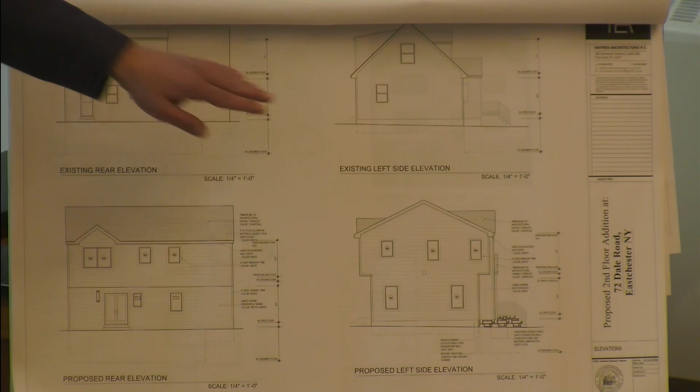It's in line, you missed it, I had a streetscape at the bottom. You know what, I'll take your word. No, it's fine, yeah, it's in line with the adjacent properties.

The Architectural Review Board reviewed it, and the referral back was to recommend approval as submitted. It looks tall on the plan, but if it's good, then it's good. Yeah, this is an example of what I was describing before, like when people do improvements, it shows they still have interest, and it just lifts the entire neighborhood.

Great, and this one is pretty uncontroversial. Can you just flip back to the front elevation, please?

Did you tell us finishes? Yes. You did? Maybe I wasn't paying attention, sorry. So again, just based on all of the samples, finishes are here.

The majority of all of the siding is HardiePlank, James Hardie HardiePlank siding, 8 1/4 inch exposure, alpine white color. The extruded box bay element on the left side, and also the existing front vestibule area, are going to be a board and batten look, which is this sample here where my finger is pointing. Andersen windows, 400 series. This is an example of the front door, rear doors. This is what the railing will look like, and at the bottom here is the streetscape.

Great, very nice, thank you. What are we doing here? We're doing a public hearing.

I make a motion to open the public hearing on application 2605, 72 Dale Road. Second. All in favor? Aye.

Motion to close the public hearing on application 2605, 72 Dale Road. Second. All in favor? Aye. I make a motion to approve the same application, 2605, 72 Dale Road. Second. All in favor? Aye. Thank you very much, thank you all very much. Appreciate it, nice work.

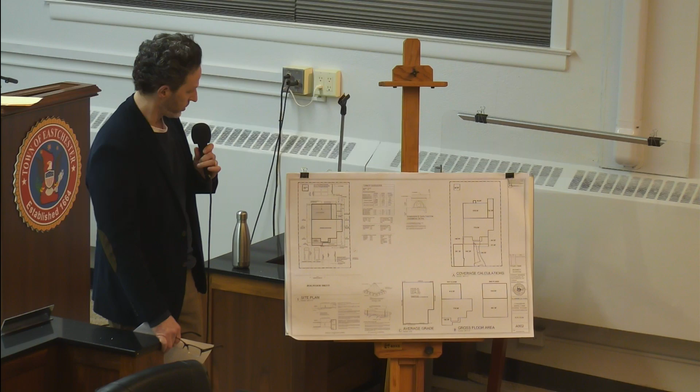Vladimir Levin, architect. This project is an addition to an existing single-family house. There's a two-story addition in the back of the house and a one-story addition in the front of the house with a porch. There's also an existing driveway that goes down to a basement garage, so that driveway is being filled in to create a new driveway that's level with the front lawn, and we're creating a second parking space that you can see on the site plan.

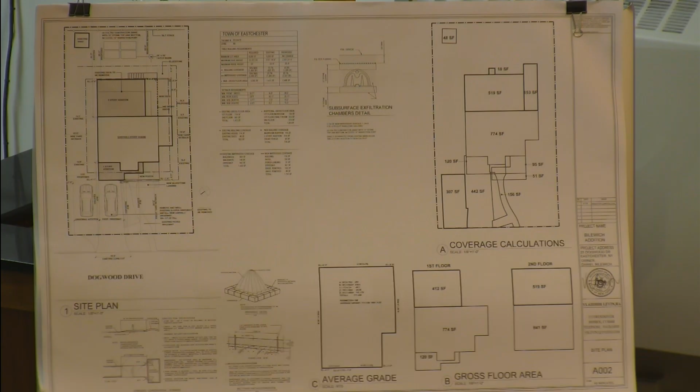This project required a front yard variance for a 26-foot front yard setback where 30 is required, and we got approval from the zoning board for that. We also went to the Architectural Review Board, who reviewed the application and gave us approval for that as well. And here we are for the final step of this journey.

Technically, the ARB makes a recommendation. Do they have any suggestions for changes to anything? They didn't, no. Okay, approved it as presented. Okay, good. Let's see if we have any.

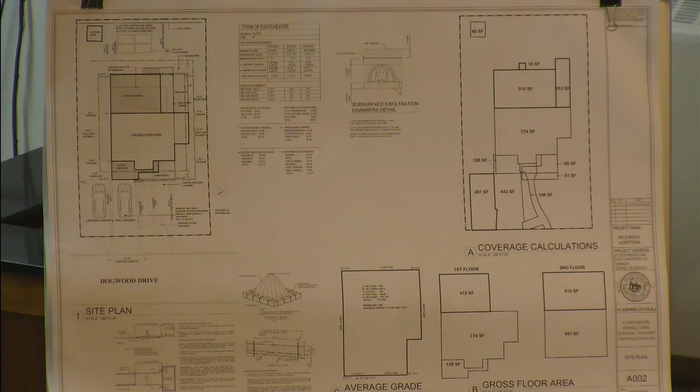We're just going to see if there are any comments from the public. I make a motion to open the public hearing on application 2579, 23 Dogwood. Second, all in favor? Aye. Motion to close the public hearing on the same application, 2579, 23 Dogwood. Second, all in favor? Aye.

Just one last question. You mentioned the setback you needed a variance for. Were there any other variances that you needed? No, just that one, the front yard. Okay, and you've gotten that from the zoning board? Just re-explain that, it's because you're adding the addition in the front, so it's eating some of the setback requirement?

I'm sorry, for some reason, last time I was here, the acoustics were really bad, and it's hard to hear when you're standing here. I'm gonna step back, maybe I could hear better. The variance was for, maybe I'll speak up too. The variance is because of the addition you're doing on the front? Yes. It's impeding on the setback requirement? Yes it is. Got it, but you have the variance already, so. We got the variance, yeah. By the way, I could hear much better here. Maybe it was my speaking. It was strange that the acoustics were strange, mumbling, you're right. Let's all speak at once and really confuse him.

Do we have any conditions? There were no conditions recommended by the Architectural Review Board, so unless you have any, there are none to propose. There's no new landscaping or anything like that? No. Good, that's easy, so we're done.